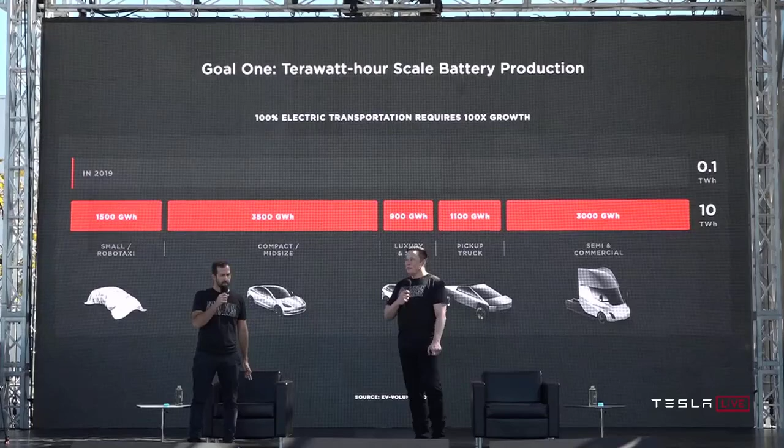You can see we're talking about 100x growth in batteries for electric vehicles to achieve this mission. And we are going to get there. It's just a matter of how fast, and our intention is to accelerate it.

You basically need on the order of roughly 10 terawatt hours a year of battery production to transition the global fleet of vehicles to electric. And the average vehicle lasts 15 years, so we're talking about 150 terawatt hours, give or take, to transition all vehicles of all types to electric. So it's a lot of batteries, basically.

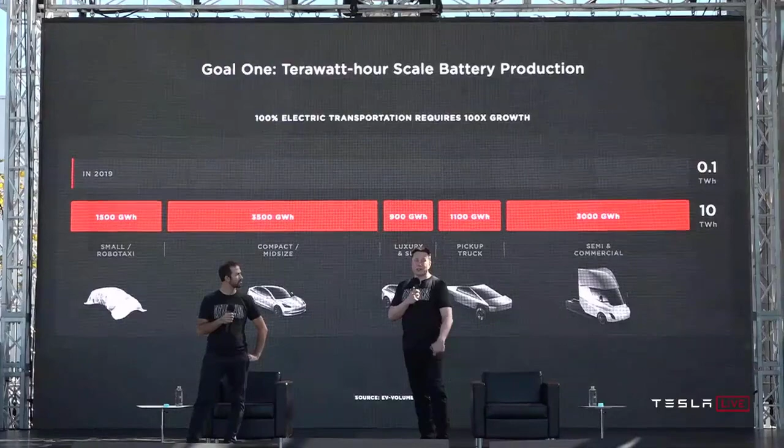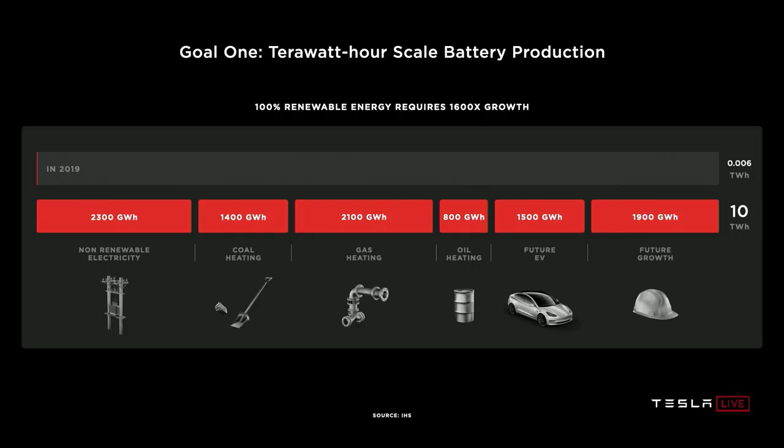And then on the grid side, we have a similar mountain to climb: 1,600 times growth from today's grid batteries to go 100% renewable on the grid and to take all of the existing heating fossil fuel uses in homes and businesses 100% electric.

This number might grow even more. As the world economy matures and as countries with high populations industrialize, we could see this number be even more. But let's say it's roughly 20 to 25 terawatt hours per year, sustained for 15 to 25 years, to transition the world to renewable. This is a lot.

So today's batteries cannot scale fast enough. They're just too small. For Giga Nevada, 150 gigawatt hours per year is probably what we expect to make out of there, but this is really pretty small in the grand scheme of things. That's only 0.15 terawatt hours.

And it costs too much. We would need 135 fully built out Nevada gigafactories to achieve 20 terawatt hours a year. It's not scalable enough of a solution. We need a dramatic rethink of the cell manufacturing system to scale as fast as we can and should.

I think we should view this as more than just a question of money. Money is sort of like an ethereal thing, but it's really the amount of effort. You have a certain amount of effort, in terms of people and machines, and depending on how efficient that effort is, for a given amount of effort, you want the most amount of batteries. So it's not just a question of like, well, if we had two trillion dollars, tomorrow you could make this. It's not that easy. You actually need to organize a massive number of people, build a lot of machines, build the machines that make the machines.

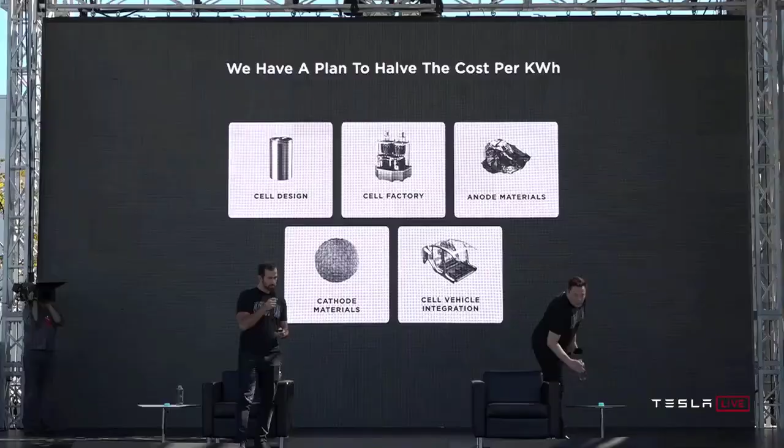And we're going to go through that plan with you today, step by step, and build up how we get to these goals and how we accelerate this transition and make our vehicles and our grid batteries more affordable. We basically thought through every element of the battery, well, almost every element. There are a few more elements that we won't get to today, but we will get to in the future.

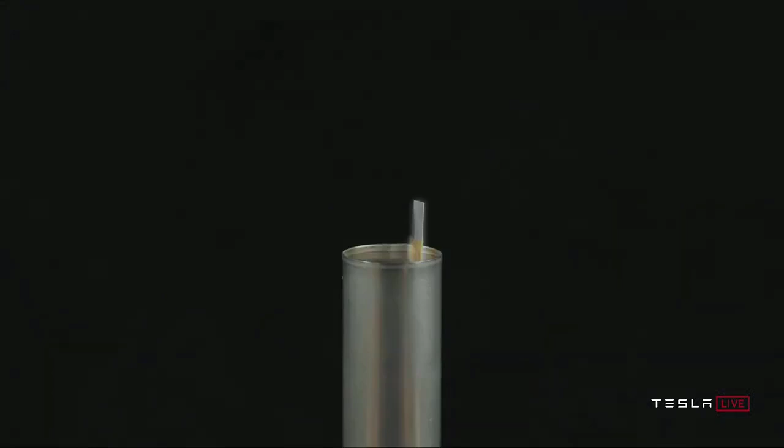So first, before we get too far into it, let's talk about what is in a battery cell. We've got the cap and the can, negative and positive terminals of the cell. When you open that cell, you've got a tab connected to those terminals, what we call the jelly roll, which is the wound electrodes on the inside.

You can actually see what this looks like as you unwind it. This is over one meter long in a typical 2170 cell. So it's quite a long winding process. And you can see the tab still there.

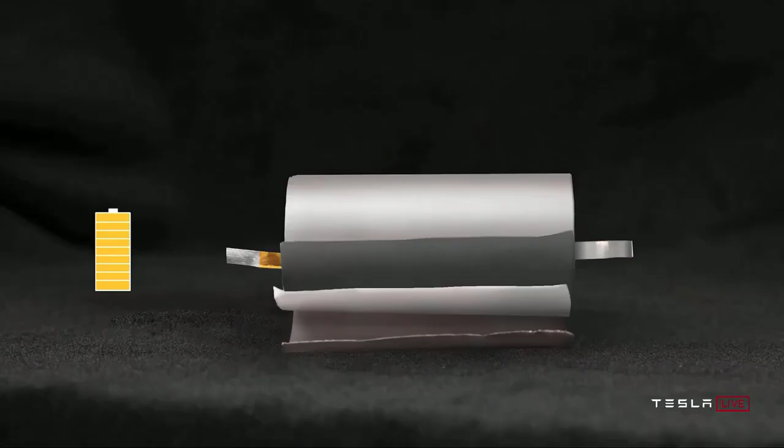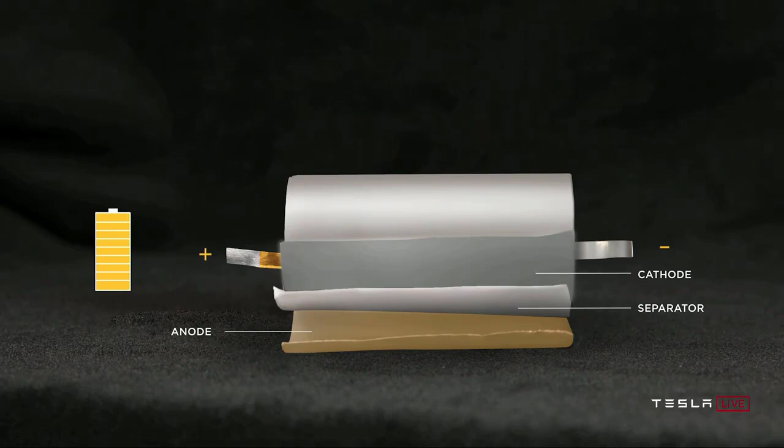To explain what's actually going on here, we've identified the anode, cathode, separator, positive and negative terminal. Watch what happens as we discharge the cell: lithium moving from anode to cathode. And the reverse, when we charge the cell, lithium moving from cathode to anode across the separator. This is the basic of what makes all lithium-ion batteries, no matter what the form factor is.

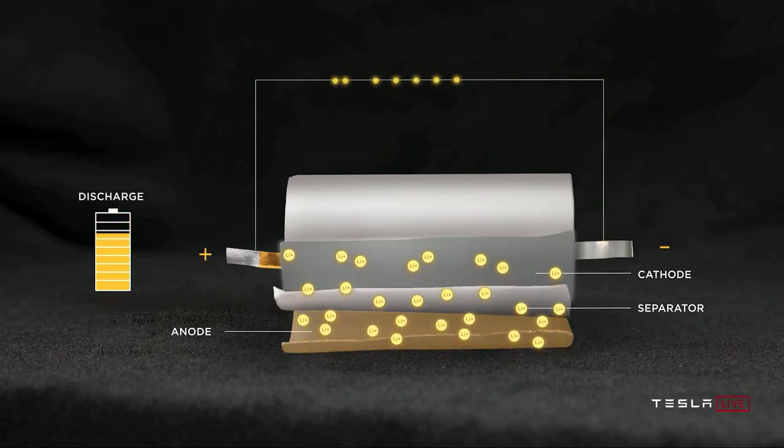And when we look at what's happened to date, at least in our products, we've moved from the 18650 form factor to the 2170 form factor through great collaboration with our partners, Panasonic, and new partners like LG and CATL, and probably others in the future.

A slight note on why it's called the 18650, although not on the slide, versus the 2170: the first two digits refer to the diameter, and the second two digits refer to the length. That helps explain why these are weird numbers. But nobody could explain to me why there was an extra zero. So I said, okay, well, we're deleting the zero that nobody can explain in future form factors.

So that's why technically it's like the 18650, but going forward it's the 2170 because we just got rid of the extra zero since it's pointless. This was an evolutionary step, going from 18650 to 2170, bringing 50% more energy into the cell.

But when we look at the ideal cell design, if we were to do it ourselves, we need to go beyond just what's in front of us and study the full spectrum of options. So we swept the key figures of merit, how much we can reduce cost, and how much vehicle range increases as we change the outer diameter of the cell. We found a sweet spot somewhere around 46 millimeters.

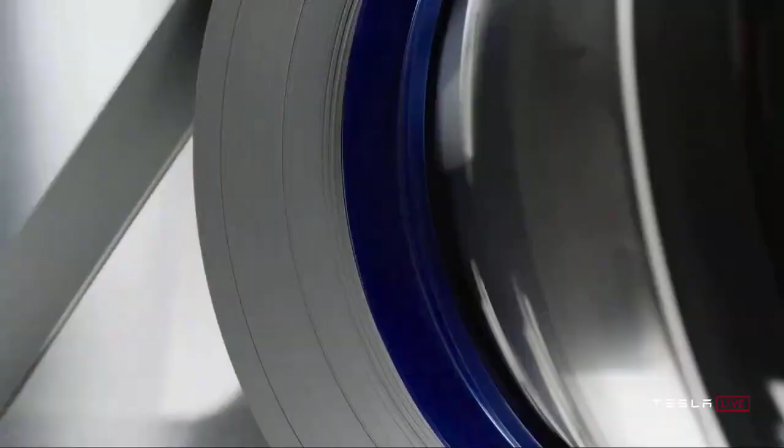Here's a video of some of what's going on in the plant.

To be clear, it will take about a year to reach the 10 gigawatt hour capacity. This is important to appreciate. When you build a factory, there's a certain capacity you design to, and then it takes time to actually achieve that capacity. So probably about a year before we get to the 10 gigawatt hour annualized rate with the pilot plant, and this is just a pilot plant. The actual production plants will be more on the order of maybe 200 gigawatt hours, maybe more over time. Thank you.

Let's stack up everything we just saw at the cell level. Just the cell form factor change enables a 14% dollar per kilowatt hour reduction. Now that you've been teased on this factory, we're going to walk step by step through that factory and discuss a series of innovations there.

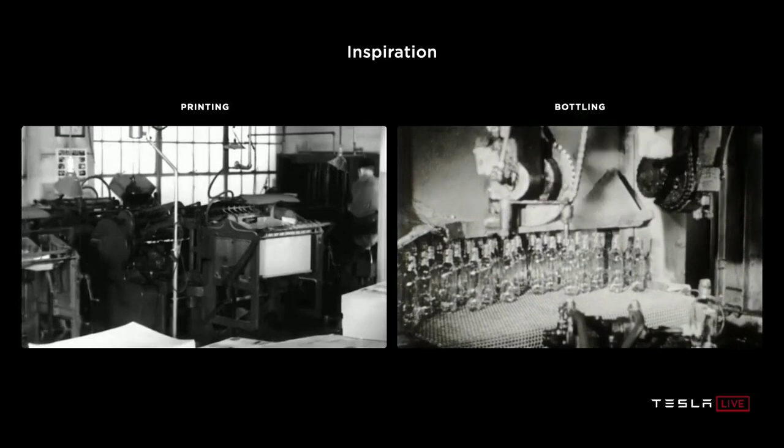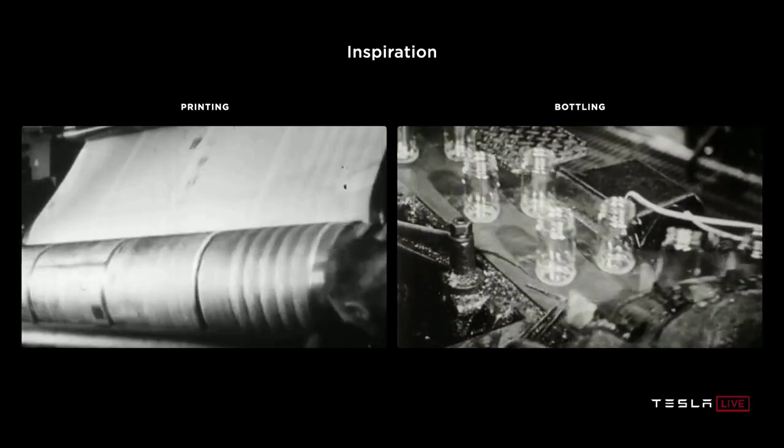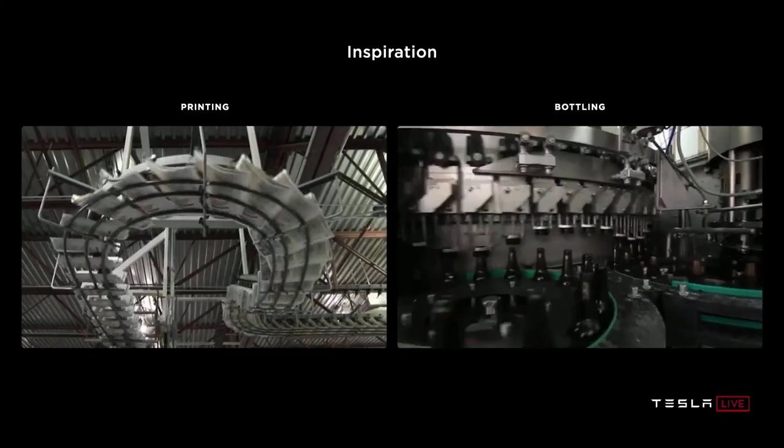When thinking about the ideal cell factory, we have inspirations behind us in the paper and bottling industry, where from humble beginnings, over a century of innovation has enabled mass scale, continuous motion, unbelievably low manufacturing cost. The lithium-ion industry is really only in its third decade of high-volume production, and it has so far to go to achieve similar scale and simplicity. That was the inspiration we set out to the team as we thought about how to marry cell design and manufacturing in the best possible factory.

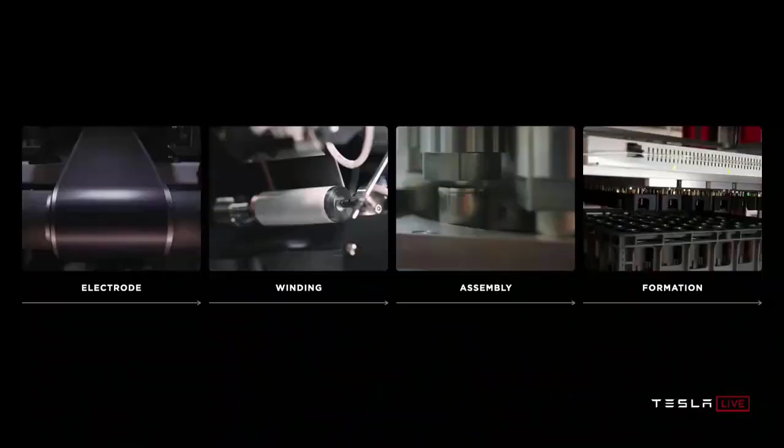Let's talk about what's in a cell factory. First, there's an electrode process where active materials are coated into films onto foils. Then those coated foils are wound in the winding process we just talked about, where if you have tabs, you have to start and stop a lot. Then the jelly roll is assembled into the can, sealed, filled with electrolyte, and sent to formation, where the cell is charged for the first time, the electrochemistry is set, and the quality of the cell is verified. We set out at every step of this process to take that inspiration and think about how we make those processes fundamentally better and more scalable.

One of the most important processes is where it all begins: the wet process of electrode coating. Just to give you a sense of scale, I'm going to walk through what's in that wet process.

You've got mixing, where the powders are mixed with either water or solvents for the cathode. That mix then goes into a large coat and dry oven where the slurry is coated onto the foil—huge ovens, tens of meters long—dried, and that solvent then has to be recovered. You can see the solvent recovery system. Finally, the coated foil is compressed to the final density. When you're looking at this, you're like, wow, that's a lot of equipment for one step, especially when you consider that little speck next to the coating oven is a person. This is serious iron involved in making batteries.

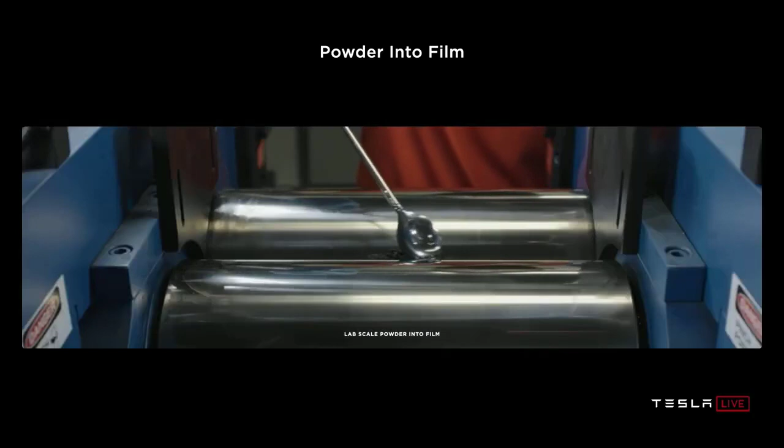It's hard, actually, to be clear. If this was easy, everyone would do it. So it's not like dry coating electrode is actually easy—it's very hard to do what appears to be a simple thing. It's worth noting we acquired Maxwell a little over a year ago. It's certainly a good company, but the dry coating they had was, I'd call it, proof of concept. Since the acquisition, we've actually revved the machine that does the dry coating four times. So we're on revision four post-acquisition of the machine, and there's still a lot of work to do—I would not say this is completely in the bag.

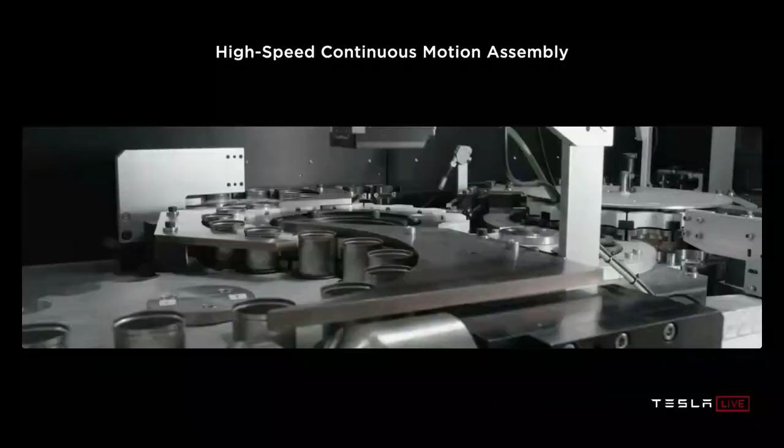The key to a high-performing assembly line is accomplishing processes while in continuous motion, thinking of the line as a highway: max velocity down the highway, no start and stop, no city driving. Exactly, no stoplights or traffic lights. You want the highway. I want the highway.

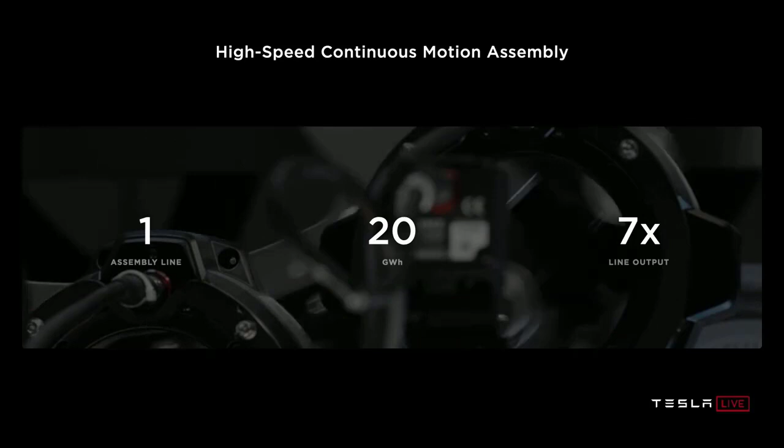Together with our internal design team that makes and designs this equipment, we coupled thinking about how to make the best cell with thinking about how to make the best equipment, so we could accomplish the fastest parts-per-minute rates on all these tools. Through that development, we got to the point where we can implement assembly lines: one line, 20 gigawatt hours, a 7 times increase in output per line. When you're thinking about scalability and pure effort, having one line be 7x the capability is just effort multiplying.

You can think about the fundamental physics of a factory. It's actually quite a lot like the rocket equation, where you've got your exhaust velocity and the log of the start-to-end masses. So it's basically saying, how fast are things going, and what percentage of the factory volume is doing useful work.

Conveyance does not count as useful work, so only the value-added steps matter. If you break the factory down into cubic meter sections, or smaller, maybe 1 liter sections, and ask, is a majority of this volume doing useful work, you'd be astounded at how bad most factories are. They're like maybe 2 or 3%, including our factory in Fremont. I think it's possible to get to at least 10 times that volumetric efficiency, more like 30% ish, maybe more, and be 10x better, which means the factory can be 10 times smaller.

And then the other thing is how fast are things going through the factory. It's like speed and density. The faster you go, a factory moving at twice the speed of another is equivalent to two factories basically. The company that will be successful is the one that with one factory can accomplish what other companies take 2, 3, or 4 factories to do. So what we're trying to do here is figure out how, with one factory, we achieve what maybe 5 or even 10 factories would normally be required to achieve.

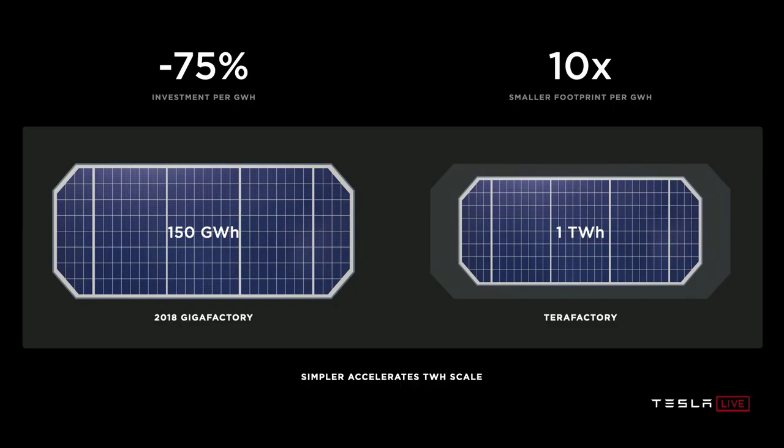Essentially, what this translates to, based on what we know today, is about a 75% reduction in investment per kilowatt hour or gigawatt hour. It's basically 4 times better than the current state of the art, to the best of our knowledge, and I think there's probably room to improve even beyond that.

From a volume standpoint, we're able to get, in a smaller form factor than Giga Nevada, many times the cell output. We can get a terawatt hour of production in less space than it took to make 150 gigawatt hours. This is pretty profound — I would not have thought this was possible several years ago, that we could get to terawatt hour scale in less space than what we currently envision for 150 gigawatt hours. Simpler accelerates terawatt hour scale, and that's what we need to do to accelerate our mission.

As Elon said, we're going to try to even improve on this as we push towards our goals. This is just talking about Tesla's internal cell production. As I tweeted out earlier, we will continue to use our cell suppliers — Panasonic, LG, and CATL — so this 100 gigawatt hours is supplemental to what we buy from suppliers.

Essentially, this reduces our weighted average cost of a cell, because it allows us to make a lot more cars and a lot more stationary storage. Long term, we're expecting to make on the order of 3,000 gigawatt hours, or 3 terawatt hours, per year. I think we've got a good chance of achieving this before 2030, but I'm highly confident we could do it by 2030. When you look at the size of that factory on the previous page, it really shows how enabling all of these advancements are in achieving a 3 terawatt hour goal by 2030.

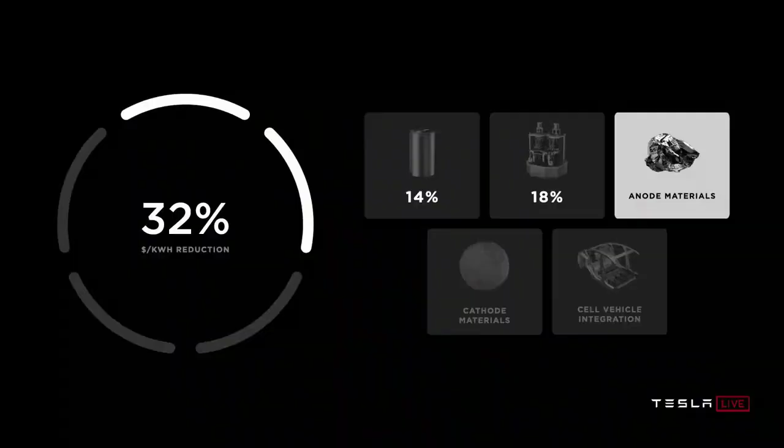Not only is all of that manufacturing innovation fantastic for enabling scale, it's also an additional 18% reduction in dollar per kilowatt hour at the battery pack level. But wait, there's more.

So we have a manufacturing system, we've got a cell design — what are the active materials we're going to put in that cell design? Let's talk about the anode first, and let's talk about silicon. Why is silicon awesome? It's the most abundant element in the Earth's crust after oxygen, which means it's everywhere — it's sand, silicon dioxide. It happens to store 9 times more lithium than graphite, the typical anode material in lithium-ion batteries today. So why isn't everybody using it?

The main challenge with silicon is that it expands 4x when fully charged with lithium. That expansion stresses the particles, they start cracking, they electrically isolate, you lose capacity, and the energy retention of the battery starts to fade. It also gums up with a passivation layer that has to keep reforming as the particles expand. Basically, with silicon, the cookie crumbles and gets gooey — good analogy.

Current approaches to solve this, which already exist — we have silicon in the cars you're all in right now — involve highly engineered, expensive materials in the scheme of things. Now, they're still great, and they enable some of the benefits of silicon.

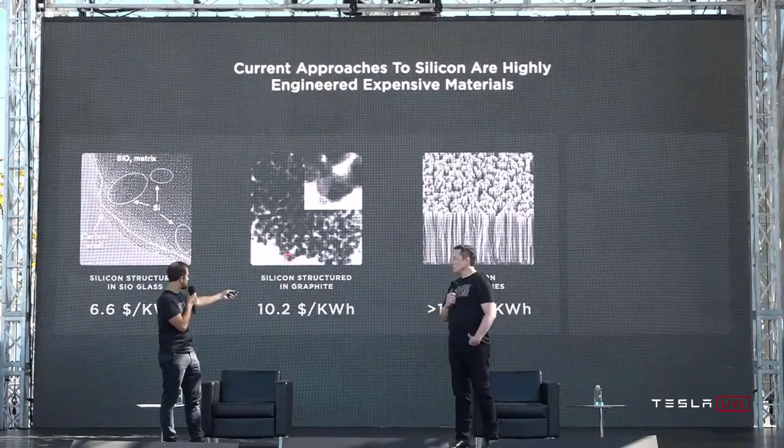They just don't enable all of it, and they're not scalable enough. You can see some of the things you may have heard of, like SiO, silicon with carbon, or silicon nanowires. That's kind of the space right now.

What we're proposing is a step change in capability and a step change in cost. What that really is, is to just go to the raw metallurgical silicon itself. Don't engineer the base metal. Just start with that and design for it to expand, in how you think of the particle in the electrode design and how you coat it.

I'm not sure if you saw this, but basically it's $1 per kilowatt hour. If you use simple silicon, it's dramatically less than even the silicon currently used in batteries made today, and you can use a lot more of it. The anode, with this silicon, would cost $1.20 a kilowatt hour.

And how does it work?

Start with raw metallurgical silicon, stabilize the surface with an elastic ion-conducting polymer coating applied through a very scalable approach—no chemical vapor deposition, no highly engineered high capex solutions—and then integrate it into the electrode through a robust network formed out of a highly elastic binder. In the end, by leveraging this silicon to its potential, we can increase the range of our vehicles by an additional 20%, just from this improvement.

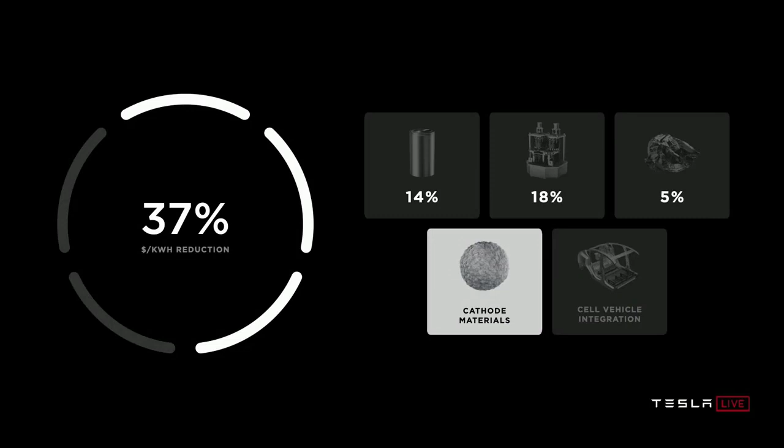It gets cheaper and longer range. And when we take that anode cost reduction, we're looking at another 5% dollar-per-kilowatt-hour reduction at the battery pack level. And there's more.

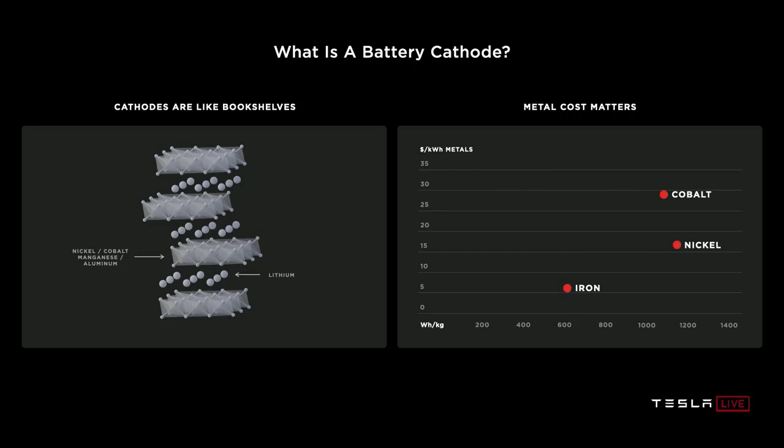Let's talk about cathodes. What is a battery cathode? Cathodes are like bookshelves, where the metal—nickel, cobalt, manganese, or aluminum—is like the shelf, and the lithium is the book. What really sets apart these different metals is how many books of lithium they can fit on the shelves, and how sturdy the shelves are.

Cobalt is... it's tough to figure out exactly the right analogy to explain cathode and anode, but a bookshelf is probably a pretty good one, in the sense that you need a stable structure to contain the ions. You want a structure that doesn't crumble or get gooey—that holds its shape in both the cathode and the anode. As you're moving these ions back and forth, it needs to retain its structure. If it doesn't, you lose cycle life, and your battery capacity drops very quickly.

Absolutely, I totally agree. People are always talking about what the cathode is going to be—is it NCA or whatever? The thing to consider is just fundamentally what the nickel and other metals are capable of, and that's what we have on the chart here: dollar per kilowatt hour of just the metal, using London Metal Exchange prices, versus the energy density of just the cathode. You can see nickel is the cheapest and has the highest energy density, which is why increasing nickel is a goal of ours and really everybody's in the battery industry.

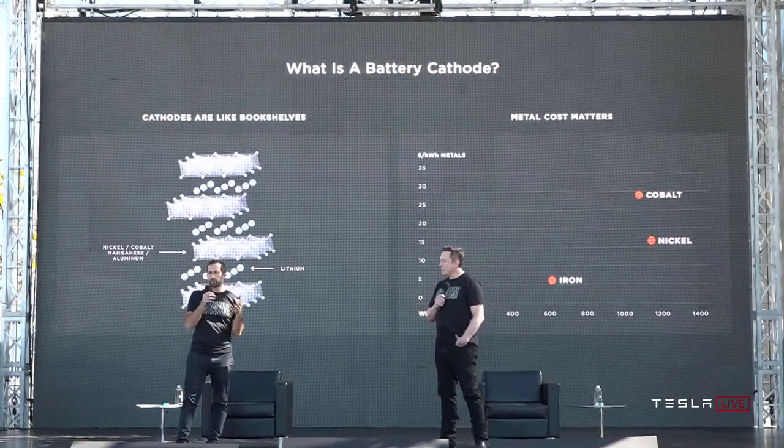But one of the reasons cobalt is even used at all is because it's a very stable bookshelf, and the challenge with going to pure nickel is stabilizing that bookshelf with only nickel. That's what we've been working on with our high-nickel cathode development, which has zero cobalt in it. Leveraging novel coatings and dopants, we can get a 15% reduction in cathode dollar per kilowatt hour. It's a big deal.

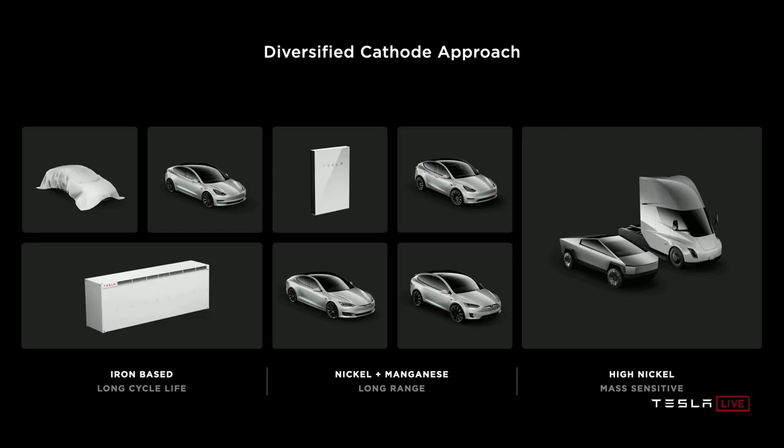But it's not just about nickel. In order to scale, we really need to make sure we're not constrained by total nickel availability. I actually spoke with the CEOs of the biggest mining companies in the world and said, please make more nickel—it's very important. And I think they are going to make more nickel.

But I think we need a kind of three-tiered approach to batteries: starting with iron, that's kind of a medium range; then nickel manganese as a medium-plus, intermediate option; and then high nickel for long-range applications like Cybertruck and the Semi. Something like a semi truck, it's extremely important to have high energy density in order to get long range.

Just to give iron a bit more time—although if you look at watt-hours per kilogram at the cathode level, iron looks like nickel is twice as good. But when you've fully considered everything at the pack level, nickel is only about 50 or 60% better than iron.

Iron is a little better than it would seem when you look at it at the pack level fully considered. It's not as good as nickel. Nickel is like 50 to 60% better, but iron is actually pretty good, and good for stationary storage and for medium range applications where energy density is not paramount.

For intermediate applications, it's kind of a nickel manganese. It's relatively straightforward to do a cathode that's 2/3 nickel, 1/3 manganese, which would allow us to make 50% more cell volume with the same amount of nickel, with very little energy trade-off. Just enough that you'd still want 100% nickel for something like a semi-truck, but really not much of a sacrifice at all.

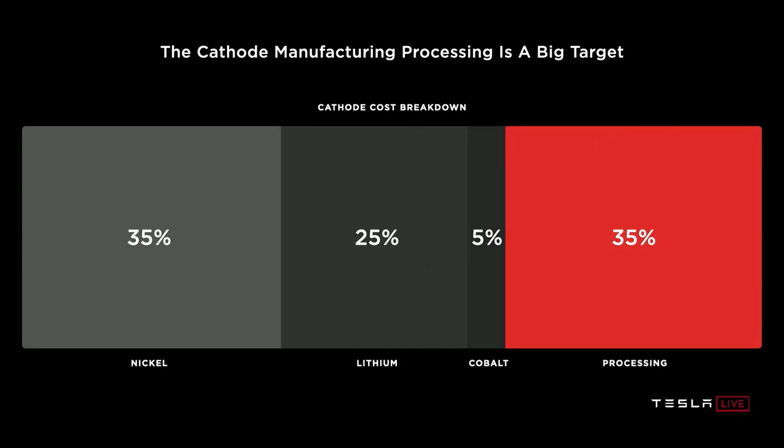Beyond the metals, because a lot of people spend time talking about the metals, actually the cathode process itself is a big target. 35% of the cathode dollar per kilowatt hour is just in transferring it into its final form. So we see that as a big target, and we decided to take that on.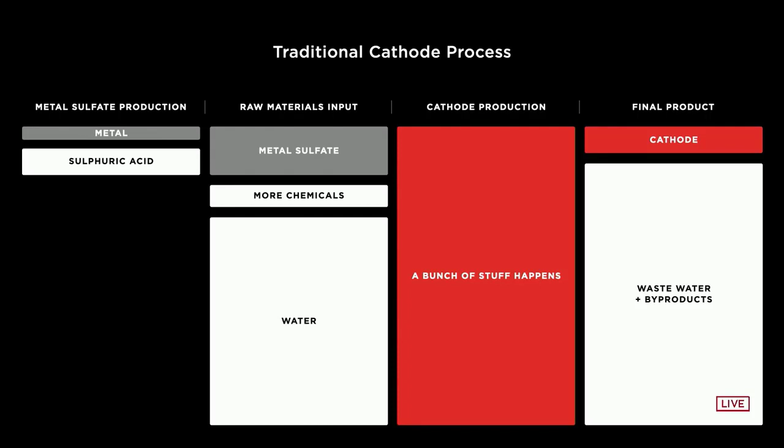It's insanely complicated. If you look at the total journey, like it's a small world journey of 'I am a nickel atom, what happens to me,' it's crazy. You're going around the world three times. There's the moral equivalent of digging a ditch, filling in the ditch, and digging the ditch again. It's total madness, basically.

These things just grew up as legacy processes, just kind of how it was done before. People connected the dots but really didn't think of the whole thing from a first principles standpoint, asking how do we get from the nickel ore in the ground to the finished nickel product for a battery. So we've looked at the entire value chain and asked how we can make this as simple as possible, and that's what we're proposing here with our process.

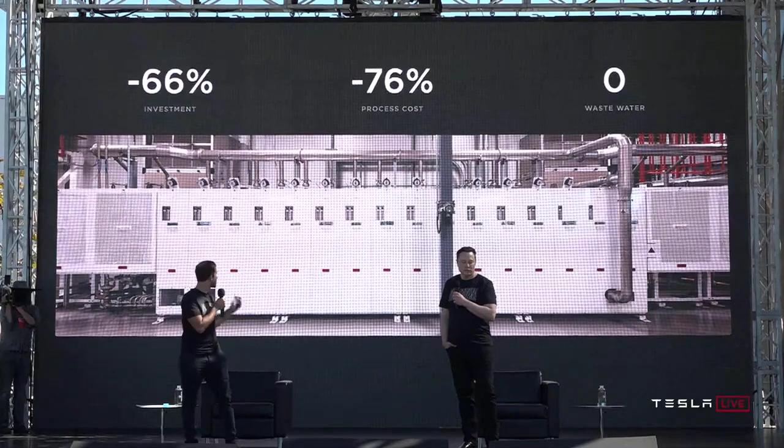As you can see, a whole lot less is going on here. We get rid of the intermediate metal sulfate step, recirculate the water, with no wastewater at all. When you summarize all of that, it's a 66% reduction in CapEx investment, a 76% reduction in process cost, and zero wastewater — a much more scalable solution.

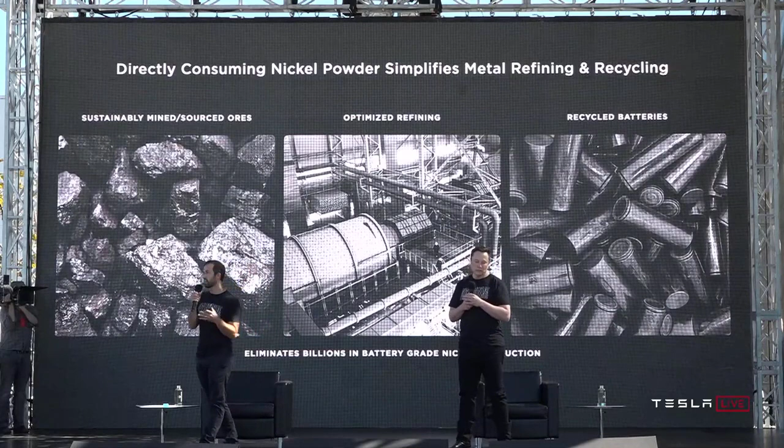When you think about the fact that now we're actually just directly consuming the raw metal nickel powder, it dramatically simplifies the metal refining part of the whole process. So we can eliminate billions in battery-grade nickel intermediate production — it's not needed at all.

We can also use that same process we showed on the previous page to directly consume the metal powder coming out of recycled electric vehicle and grid storage batteries. So this process enables both simpler mining and simpler recycling.

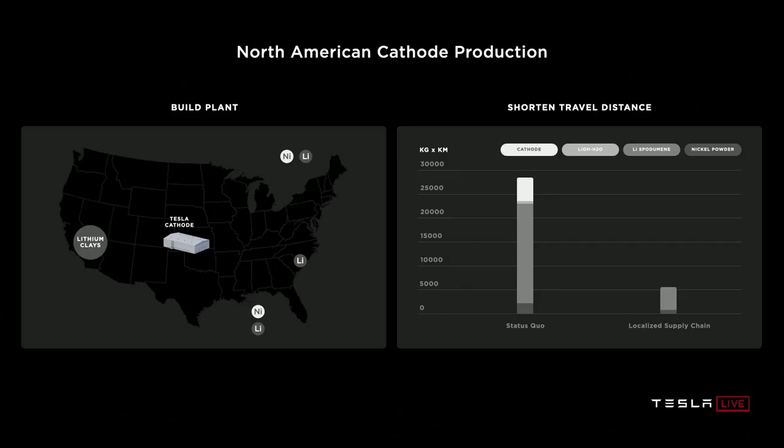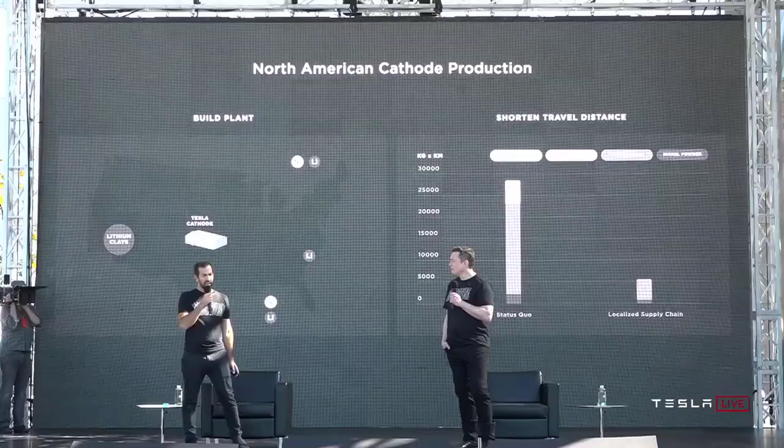Now that we have this process, we're going to go build our own cathode facility in North America, leveraging all of the North American resources that exist for nickel and lithium. Just by localizing our cathode supply chain and production, we can reduce miles traveled by all the materials that end up in the cathode by 80%, which is huge for cost. To be clear, cathode production would be part of the Tesla cell production plant — raw materials coming from the mine, and out comes a battery. And on that note, the way lithium ends up in the cell is through the cathode.

So we should obviously do on-site lithium conversion as well, using a new process that we're going to pioneer. That's a sulfate-free process again — skip the intermediate. It's a 33% reduction in lithium cost, and a 100% electric facility co-located with the cathode plant.

It's important to note that there is a massive amount of lithium on Earth. Lithium is not like oil—there's a massive amount of it pretty much everywhere. In fact, there's enough lithium in the United States to convert the entire United States fleet to electric, all the cars in the United States, there's like 300 million or something like that. Every vehicle in the United States can be converted to electric using only lithium that is available in the United States, discovered today, what we already know exists. People really haven't even been looking, because it's just widely available.

But it is important to say, okay, what is the smartest way to take the ore and extract the lithium and do so in an environmentally friendly way? Looking at it from a first principles physics standpoint, instead of just the way it's always been done, we found that we can actually use table salt, sodium chloride, to basically extract the lithium from the ore. Nobody's done this before, to the best of my knowledge. Nobody's done this, and all the elements are reusable.

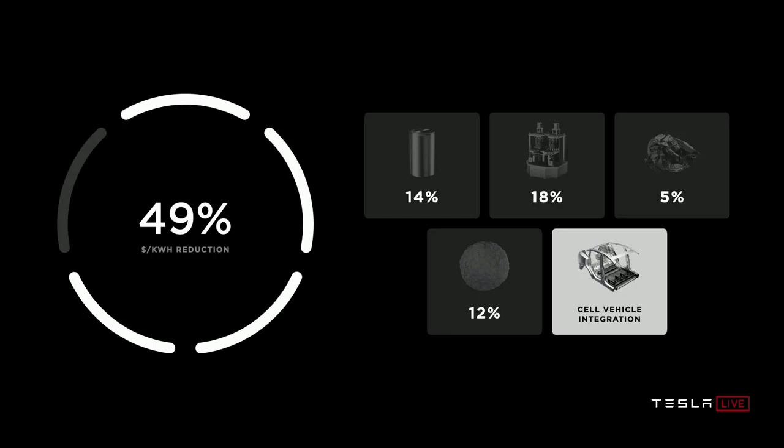So there's an architecture that we've been wanting to do at Tesla for a long time, and we finally figured it out. I think it's the way that all electric cars in the future will ultimately be made. It's the right way to do things.

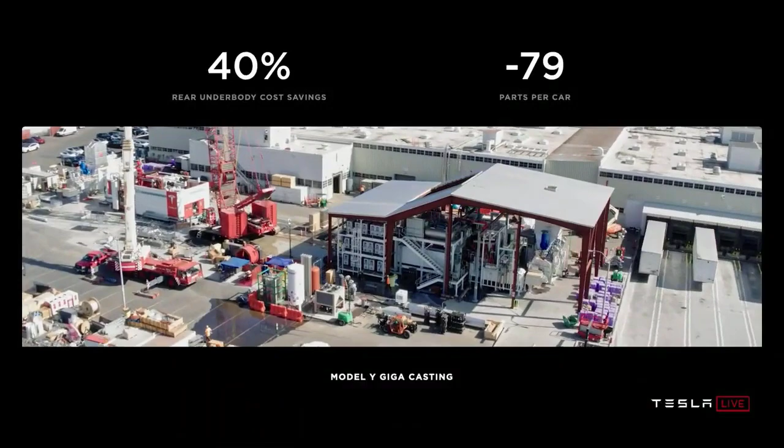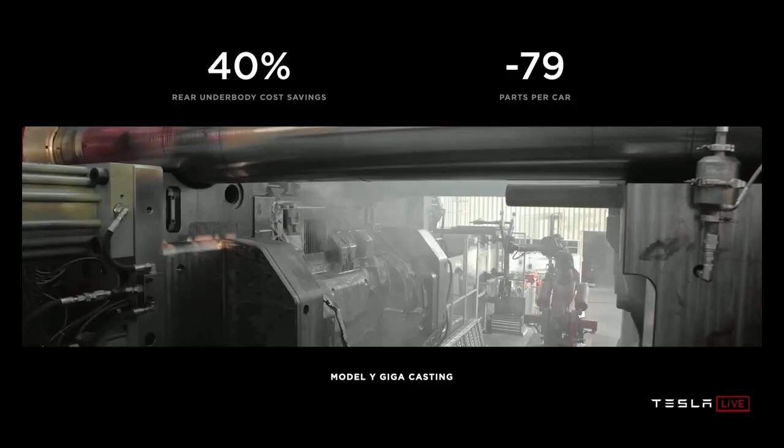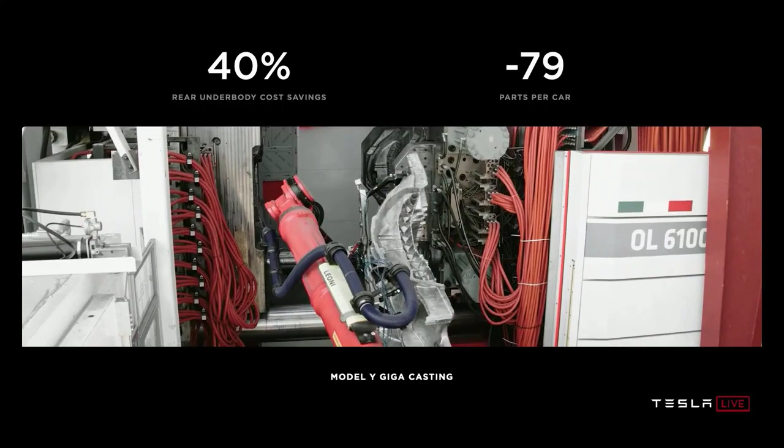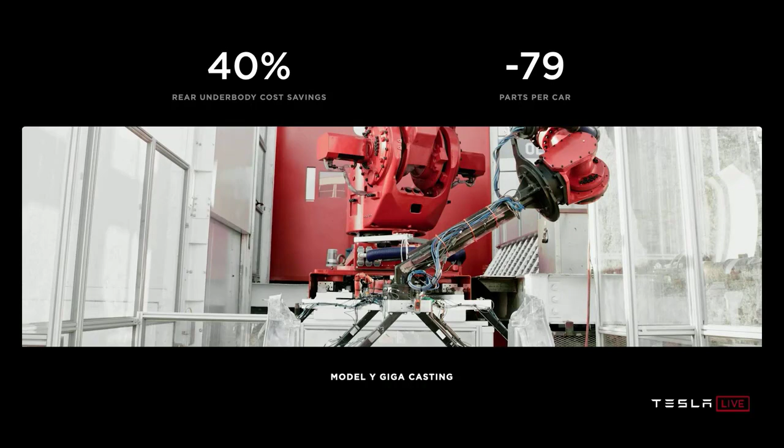So it starts with having a single piece casting for the front body and the rear body. And in order to do this, we commissioned the largest casting machine that has ever been made, and it's currently working just over the road at our Fremont plant. It's pretty sweet. Currently making the entire rear section of the car as a single piece, high pressure die cast aluminum. And in order to do this, we actually had to develop our own alloy, because we wanted a high strength casting alloy that did not require coatings or heat treatment.

This is a big deal for castings, especially with a large casting. If you heat treat it afterwards, it tends to deform—it kind of does this potato chip thing. So it's very hard to keep a large casting to have its shape.

So in order to achieve this, there was no alloy that existed that could do this. So we developed our own alloy, a special alloy of aluminum that has high strength without heat treat and is very castable. That's a great achievement of our materials team. In fact, we've got a lot of advanced materials coming for Tesla, new alloys and materials that have never existed before.

So you're basically making the front and rear of the car as a single piece, and then that interfaces to what we call the structural battery, where the battery for the first time will have dual use. The battery will both have the use as an energy device and as structure.

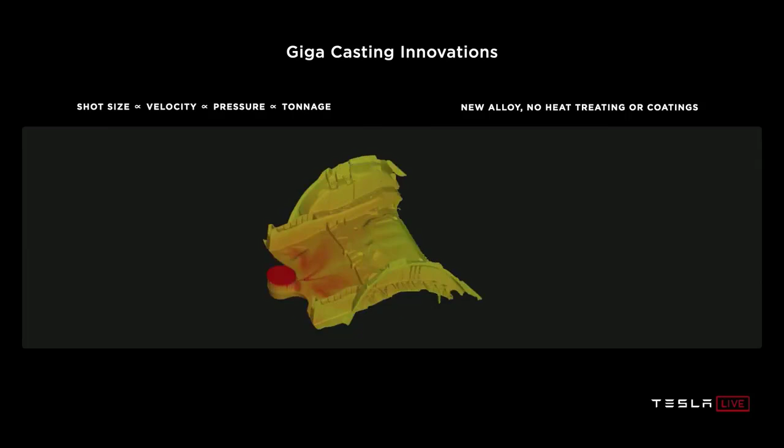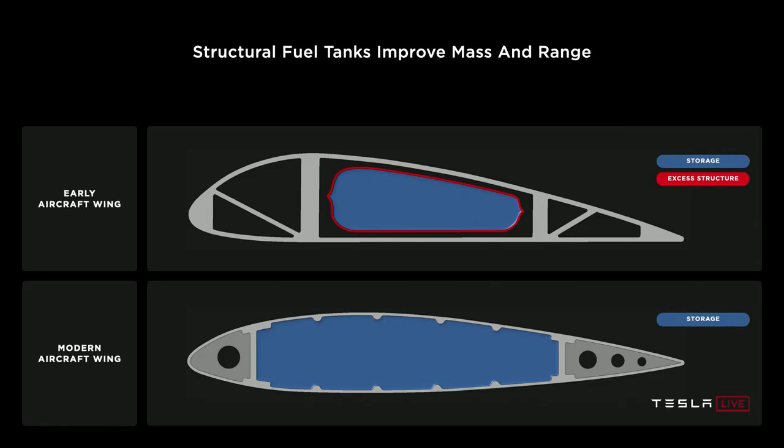This is absolutely the way things are done. In the early days of aircraft, they would carry the fuel tanks as cargo. The fuel tanks were quite difficult to carry, basically worse than cargo. You had to bolt them down, it was very difficult. Then somebody said, hey, what if we just make the wing tanks, what if we just make the fuel tank in wing shape? So all modern airplanes, the fuel tank, your wing is just a fuel tank in wing shape. This is absolutely the way to do it.

And then the fuel tank serves as dual structure, and it's no longer cargo. It's fundamental to the structure of the aircraft. This was a major breakthrough. We're doing the same for cars.

So this is really quite profound. Effectively, the non-cell portion of the battery has negative mass. We save so much mass in the rest of the vehicle, more than the non-cell portion of the battery. So it's like, well, how do you really minimize the mass of a battery? Make it negative. Make the non-cell portion of the battery pack negative.

It also allows us to pack the cells more densely because we do not have intermediate structure in the battery pack. So instead of having supports, stabilizers, stringers and structural elements in the battery, we now have a lot more space in the battery because the pack itself is structural.

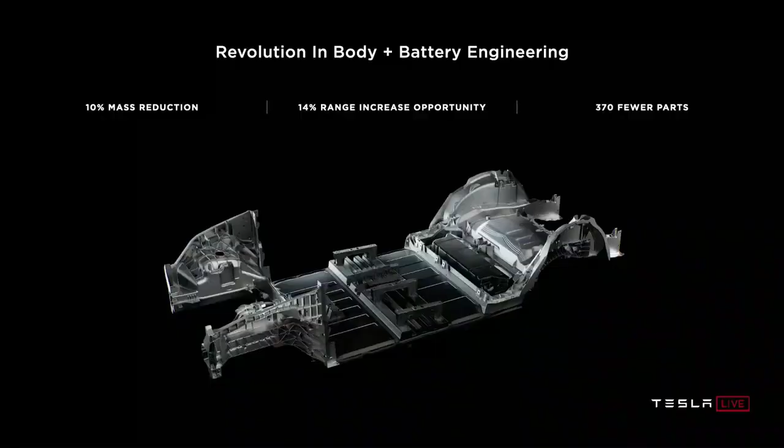Like I said, 10% mass reduction in the body of the car, 14% range increase, 370 fewer parts.

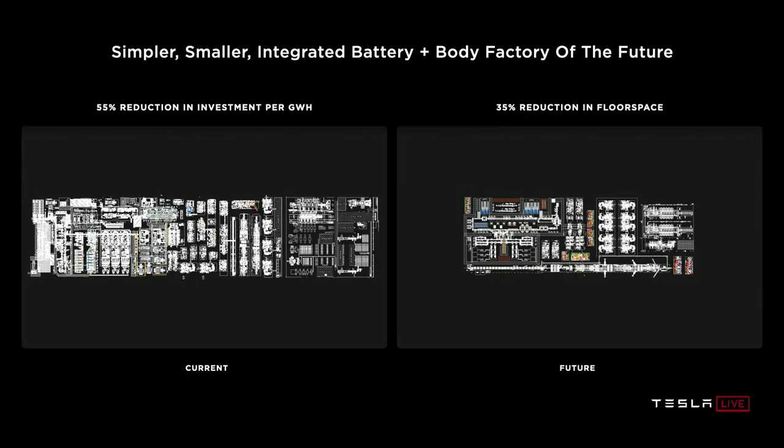I really think that long term, any cars that do not take this architecture will not be competitive. It's not just a better product, but in the factory it's a massive simplification. You saw the part removal, the casting machines, the structural battery pack. We're looking at over 50% reduction in investment per gigawatt hour, 35% reduction in floor space, and we'll continue to improve that as we make the vehicle factory of the future.

It's major improvements on all fronts, from the cell all the way to the vehicle. In addition to enabling additional range and improving the structural performance of the vehicle, it's worth another 7% dollar per kilowatt hour reduction at the battery pack level, bringing our total reductions now to 56% dollars per kilowatt hour.